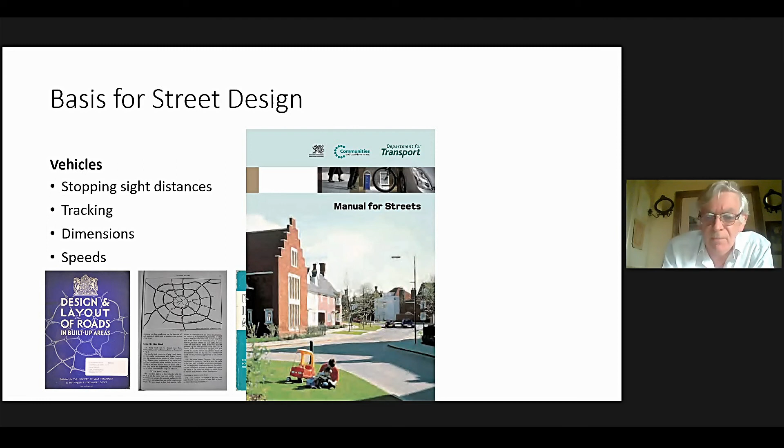Manual for Streets changed all that. It put people at the top of a user hierarchy. And since then, we've had the Equality Act, which now enshrines this in law. It's not just guidance, this is a formal legal requirement. There's a requirement to have due regard to the need to promote equality of opportunity in relation to protected characteristics such as age, gender, disability.

This means we should be considering the different walking and cycling speeds. A blind person may walk at 1 mile an hour or less, an elderly person similarly. This means crossing a street is a long and protracted experience where they're exposed to danger from oncoming traffic.

The consequences of different impact speeds and injury risk should be taken into consideration, as well as the ability of children to judge the speed and distance of oncoming traffic. They have major difficulties judging the speed of oncoming traffic travelling at more than about 20 miles an hour.

There is income and wealth. Not all members of society are able to afford to run a car, and the Equality Act requires that to be considered. There is a due regard to consider those issues.

And then we have this duty of care owed to both careful and negligent road users. These things must be taken into consideration when settling on decisions on street design. A practical example: there are local authorities, even at this moment, who are requiring that the size of refuse collection vehicles be taken into consideration when deciding on street design.

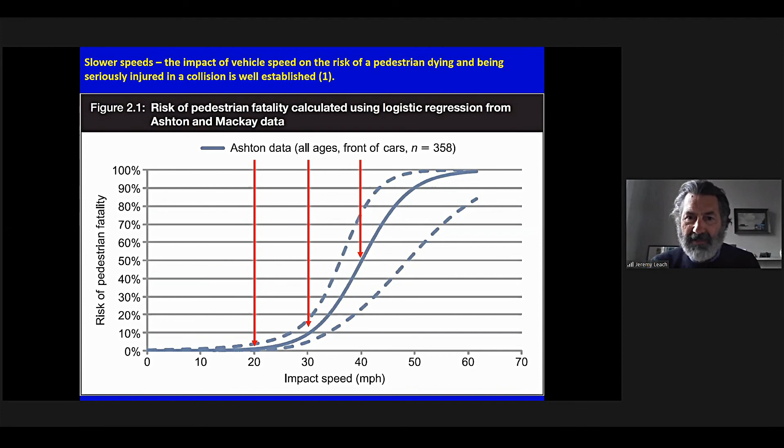Because it relates to street design, we're going to look this evening at slower speeds, safe street design, and safe space for cycling. The relationship between vehicle speed and pedestrians dying or being seriously injured in a collision is well established. Here's a chart showing fatality risk, and obviously it's much higher in terms of serious injury risk. We feel slower speeds have to be the building blocks of fairer towns, cities and villages. This was mentioned, certainly more than in passing, in the previous manual for streets.

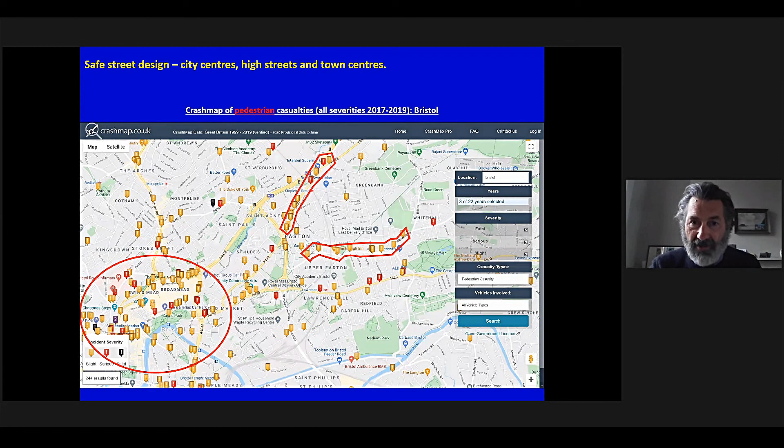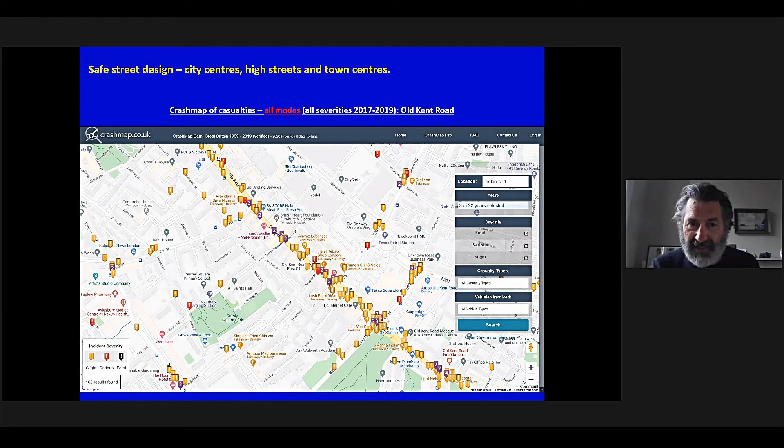This isn't to pick on any one particular example of the Red Route network, but you can see the characteristics: a lack of crossing facilities, higher speeds in free-flowing traffic, space allocation between people and vehicles clearly weighted towards vehicles, little emphasis on the role of the high street, no provision for people cycling. And when you do get to the provision for people on foot, the quality of the environment there is extremely low.

Another area that's really important is around junctions and crossings. More than 2/3 of deaths and serious injuries to pedestrians, cyclists and motorcyclists occur at junctions. People are at the greatest risk when crossing provisions are non-existent or poor, when they've got to wait too long to cross, or there's too little time given to cross.

And finally, talking about neighbourhood streets. Again, it's really important that we focus on this, which is why there's been so much focus on it in the last year or so. Traffic volumes have increased enormously on unclassified roads in Great Britain since 2009 - almost a 3/4 increase in the last 10 years in London, driven by the advent of sat-nav technology, the rise of Uber, and online deliveries.

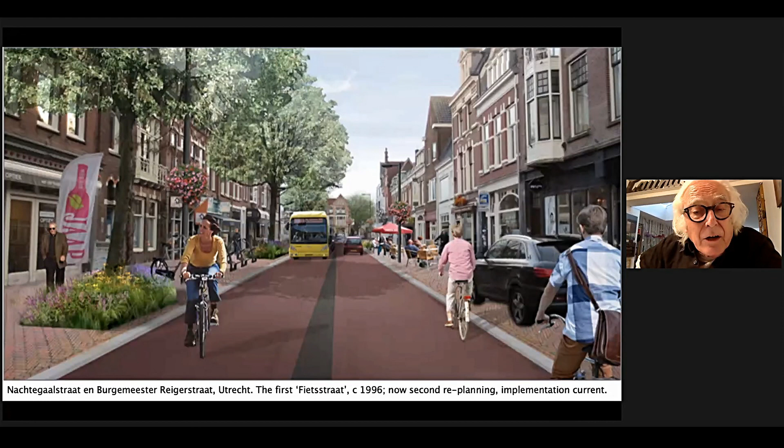It's easy to talk about bicycle streets. This is an example from Utrecht that took 20 years to develop. It was the first cycle street in the Netherlands and had a raised median, which was regarded as dreadful by cyclists because they felt motorists were hunting them. After 20 years, including 5 recent years of negotiations, they're now going to make it look like a fietsstraat. I'm not sure whether a fietsstraat is a legal entity in the Netherlands, but if we have narrow roads in towns with a reasonable amount of cycle traffic, how do we achieve it? One lesson I hope we'll take on board in Manual for Streets is to designate this kind of street where it is not legal to overtake a cyclist.

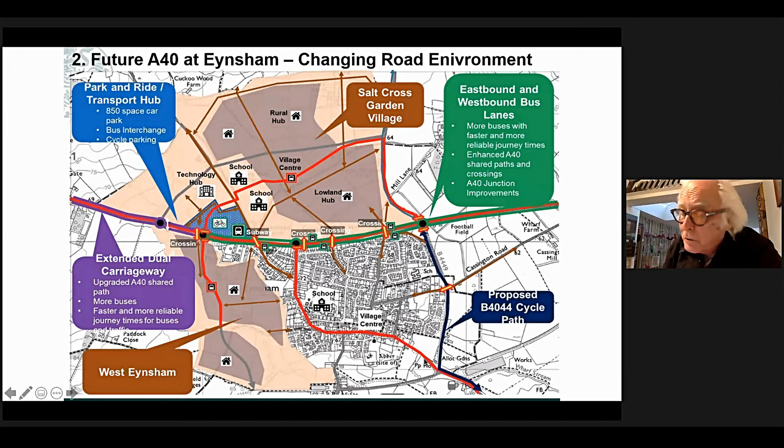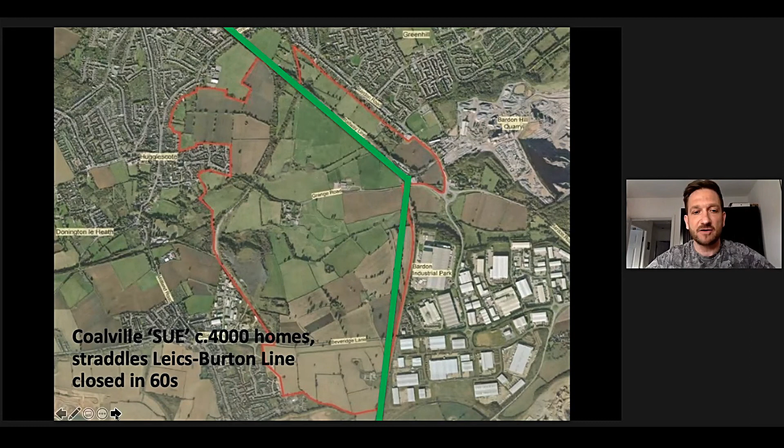And it straddles the Leicester to Burton line that carries freight now and refurbished tube trains down to the capital. But the line was closed to passenger traffic in the 60s. Now, the original plan when this was allocated was the line would be reopened on the back of government investment, and that investment has never been forthcoming.

So the opportunity to create a guided busway or equivalent between 4,000 new homes and Leicester city centre has been lost. A trip that could have taken 12 minutes on a guided bus at 50 miles an hour - sorry, there should be another slide there - takes much longer.

The developer wanted to put a protected cycleway network in on that development, but the Highways Authority didn't see it as being necessary to the safe and effective functioning of the highway, so insisted on its complete removal.

Obviously things have changed in COVID, but we all know that there might be some element of returning back to the city, returning back to the office.

Do we as the urban design group need to be more pragmatic than purists? Can we sustain arguments that the only way to improve volume house building is by breaking up volume house builders?

Will codes really help under-resourced, or very under-resourced, local planning authorities? Maybe codes will be outsourced - they'll be expensive, but will they be practical for day-to-day development management use? How can we break the cycle when there are examples where we ourselves are fueling some of the worst we see?

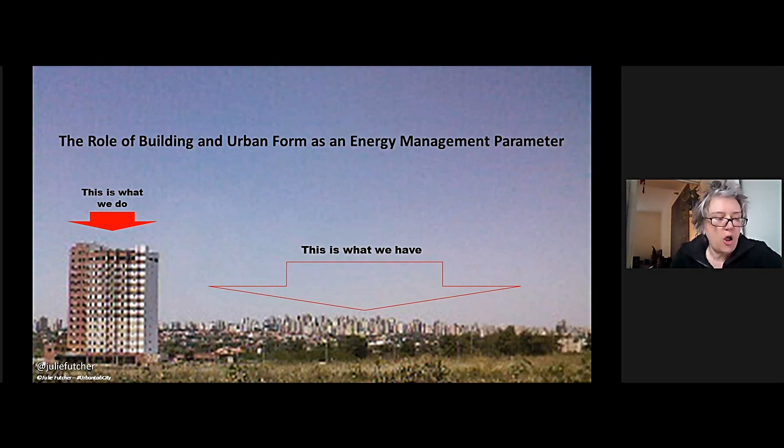In part, these oversights are a consequence of urban climate research being fragmented in its approach, drawing upon several different disciplines, each focusing on different spatial and timescales, often using different terminology to describe the relevant features, processes and outcomes. As a result, urban climate knowledge is often misunderstood, underestimated, and misrepresented in much of the non-urban climate literature.

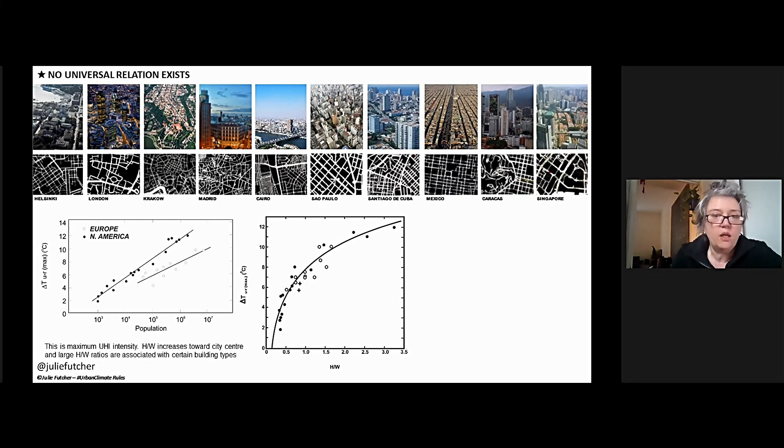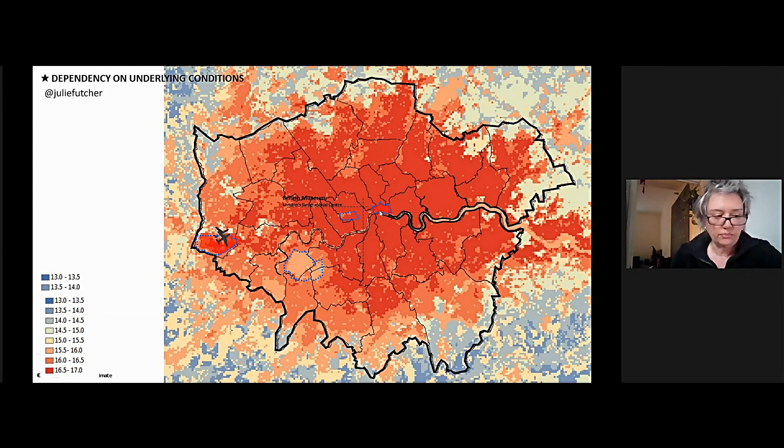To address this, urban land cover is categorised into a series of local climate zones based on their approximate ability to modify local surface climates due to their fabric, land cover, structure, and metabolism. However, even within these local climate zones, intra-urban climate differences can be found, where one side of the street can differ from the next, or be more shady or sunlit, sheltered, gusty, have good or poor air quality, and so on. Scale is important - at the intra-urban scale, climate differences can be significant and directly impact on both building performance and the conditions of the surrounding area.

To explore the significance of these net energy effects, we have developed a series of proof-of-concept research activities based around the City of London.

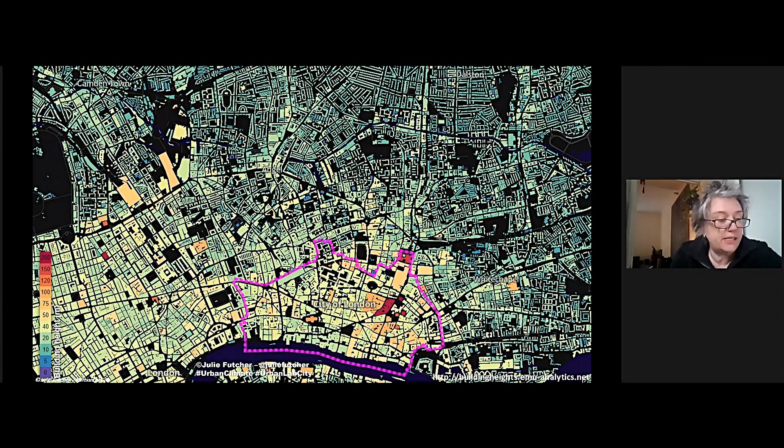These activities include an urban climate walk, where we walk through - you can just about make out the route here along this pink dashed line - using our bodies as thermometers to identify what's going on as we walk through. What are the impacts of all of these buildings, both the lower rise ones as well as the high rise ones, on our experiences, on our levels of comfort?

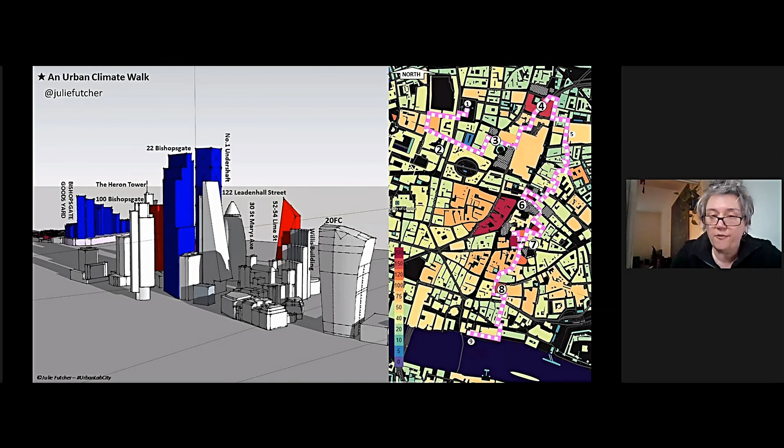This is a section where we can see how dramatic this is, how these large scale buildings have been inserted into a rather low-lying area. Now, the question is, is this good or bad? We don't know. If we removed this group of buildings here and turned it into a park, what would the net effect be?

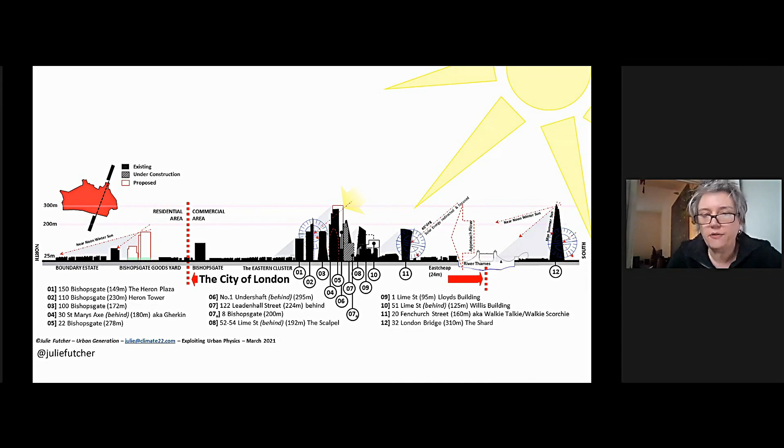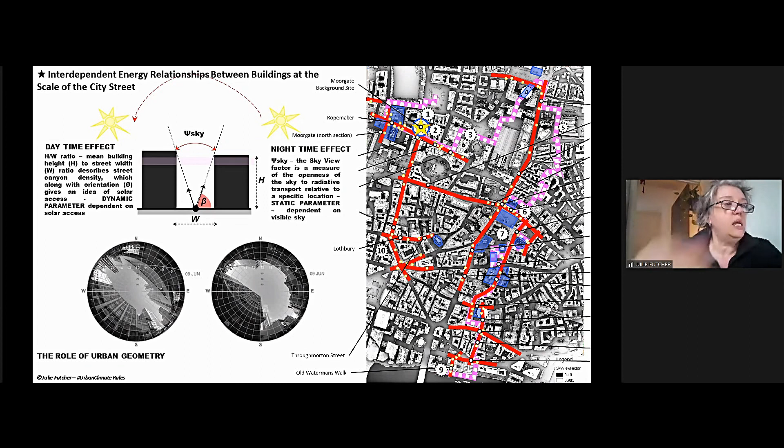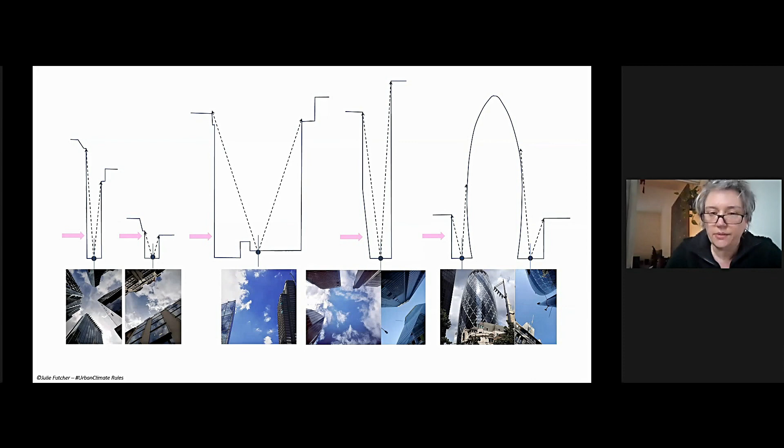As before, the city landscape is completely different depending on where and which part of the city you're in. But what we're exploring is how built form influences what's going on at street level. We're not researching what's going on inside the buildings, although we have simulated that to try and understand these interdependencies and those relationships.

We know it's a pretty obvious one that tall buildings are going to impact on our levels of shading. But if you already have a very dense landscape during the winter, the tall buildings aren't necessarily having a bigger impact on what's going on down at street level. It's the density of these areas that are impacting there, the openness to sky, or the lack of openness to sky, which is impacting on levels of daylight. The taller buildings, the shadows will pass over quickly.

I'm not saying that tall buildings are good for the environment. I'm saying that we don't understand enough about their wider implications, their far-reaching effects. What we're saying is that at the moment we measure buildings' performance that ends at the building envelope, and actually the building envelope, the boundary of the building, actually extends into the wider environment.

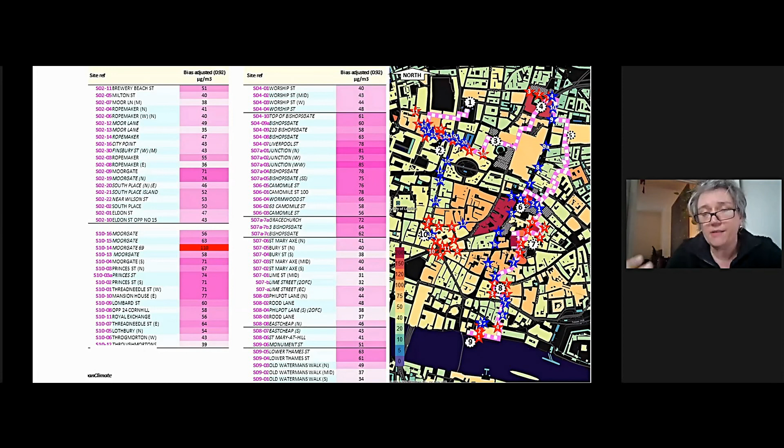We've taken air temperature readings, air quality readings, wind, maximum and average, and we have found some very surprising results. This is reports on our air quality, and what we find when we get to the city, when we get to the eastern cluster, the air quality is actually really good. So there we are, right in the city of London, right in the very heart, the very centre of it, we have really good air quality.

Would we get that good air quality if we were in a park? But that good air quality comes with a penalty, because the wind that comes off of those tall buildings is quite high and makes that area quite difficult to live in. So what might be good for a block of buildings which has a daytime function, such as office work, might be completely different to a building group used for residential purposes, where you might have good air quality, but at the cost of very windy conditions.

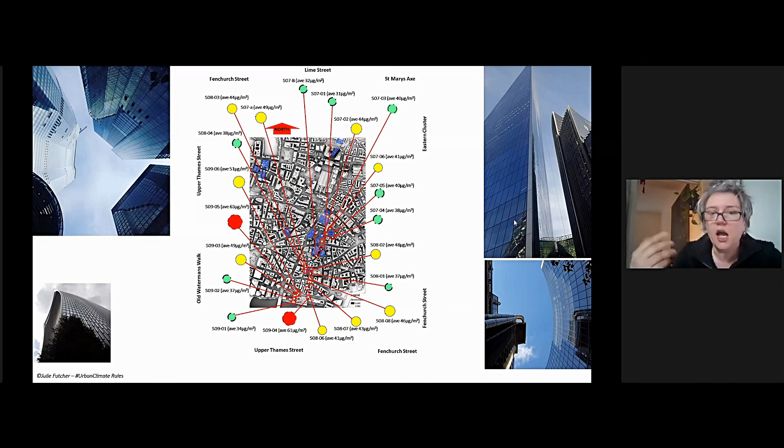Excessive warming can be managed at all scales through considered urban planning strategies. Obvious examples include those related to green vegetation and green infrastructure. However, critically, at the neighbourhood scale, built form is found to be the dominant factor in modifying radiation and ventilation exchanges at the urban surface. If properly understood, our built environments can be optimised to create effective, efficient, comfortable and healthy streets.

Both climate change and COVID have raised questions about the suitability of high density development, not necessarily tall buildings, high density. Tall buildings don't necessarily mean high density. High density development brings into stark relief the vital importance of gardens and access to green space for health and well-being - the same gardens and green space that are needed for climate responsive urbanism. That's my talk, thank you very much.

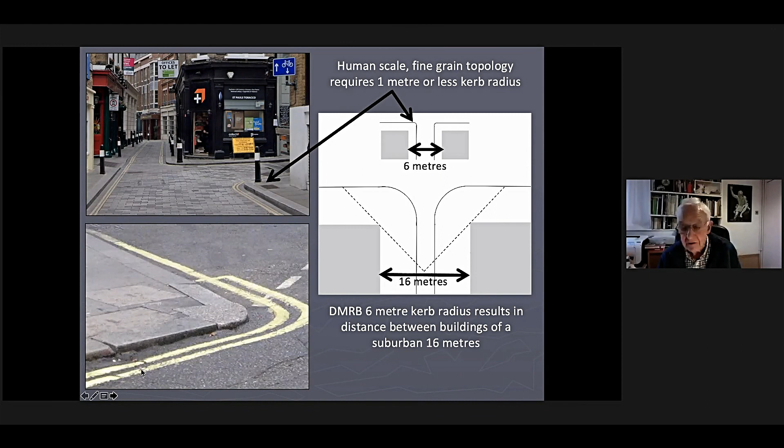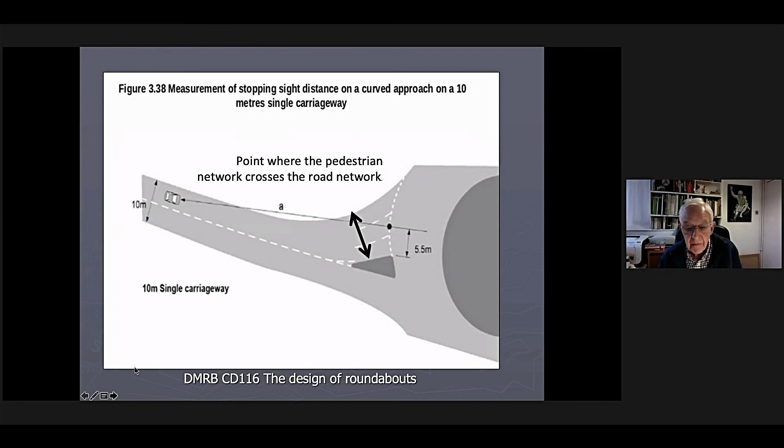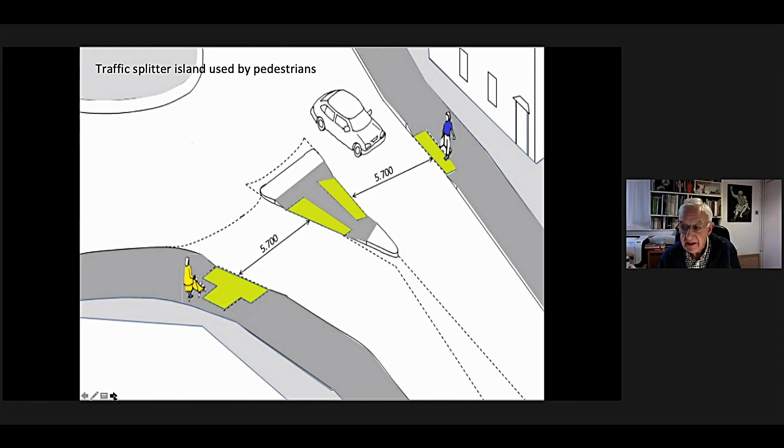The DMRB hasn't heard of things like inclusiveness. It hasn't heard about place or context or pedestrian networks. So all the designs are applicable to the Gobi Desert, but not necessarily to ordinary places, and we have splitter islands, which are terrible for pedestrians, excellent for drivers. It's still there, and to this day they're still being built - hundreds and hundreds of them.

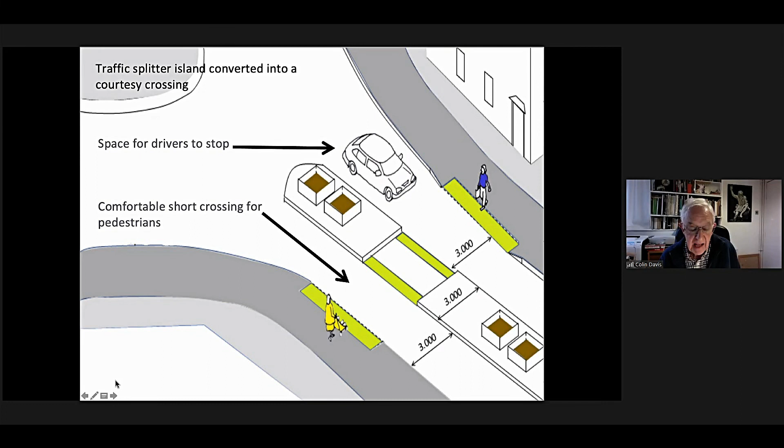And if you want to change it and make it slightly more pedestrian friendly, you have to have a big argument - you have to say, I will overturn the DMRB, because the DMRB doesn't allow you to make any changes. It's rather like the tablets, the Ten Commandments: thou shalt do this, and thou shalt produce thine sight lines. And if you want a nice pedestrian crossing across a T-junction, as has been done in Poynton and in South London, you can't do it according to the DMRB without a huge amount of trouble. So we have to think.

And then we have the Manual for Streets. It's certainly up to date, and it will be even more up to date - Glenn Higgs will do a fantastic job. But it is seen by many engineers as urban designers talking to each other. It's discursive, and it assumes a certain amount of pre-knowledge.

Also, we have to think where it fits into the rules. The highways are governed according to highway legislation, and under that secondary legislation, the regulations. Then there's guidance and advice and special interest advice - 20 or 30 different interest groups, including Living Streets and 20's Plenty and all those other very excellent people, have their own interest advice. And the poor old highways engineer has to decide - he's the one, not particularly well paid, that has to decide what is good and what is bad.

And the MFS has an opportunity of being responsible and helping highway engineers coordinate. Perhaps its coordination role is a very important role. I'd just like to say two points that should help engineers know more about urban designers - I wonder how many engineers are here this evening - but it should also help urban designers know more about engineering. So my question is this: what previous knowledge should a user of the Manual for Streets have?

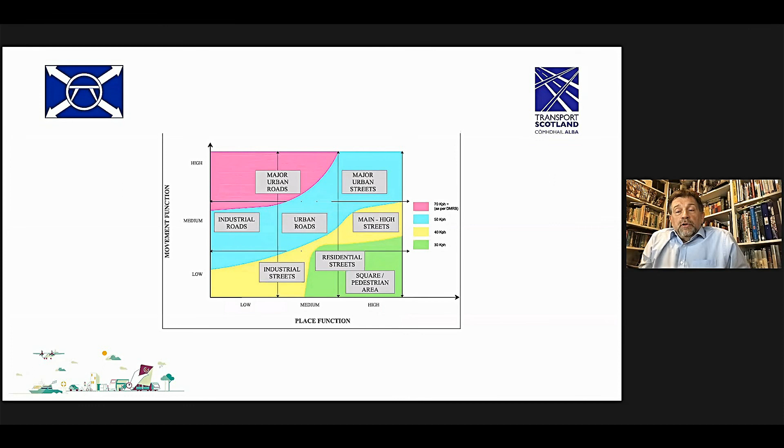And then through some research, we created a more usable place movement diagram with explanations on how to use it. So the whole principle of the document is to make it, or Designing Streets, more easily usable.

The principles section of the document, the second one, covers all the necessary consents, what's required for each element of the street to ensure that it can be adopted by the Roads Authority, and then the process to be followed with the appropriate forms. So we use standard forms in Scotland so that everybody's using the same forms.

And then in the details section, we go into much more information on the roads design, including the parking, all the required parameters, details, and along with all the construction details.

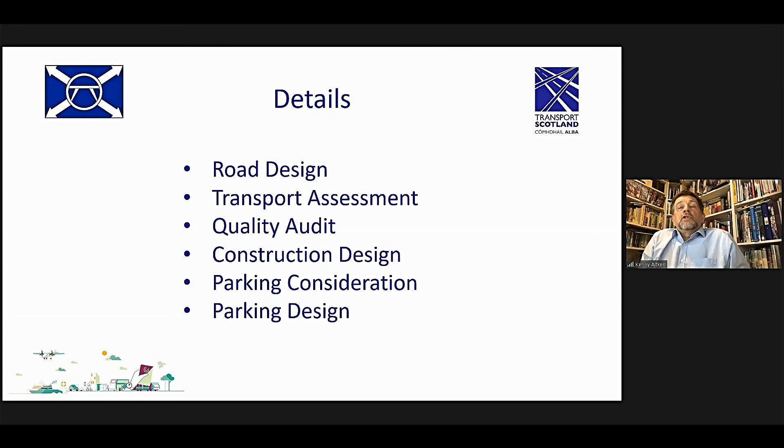So when we actually launched the document in May 2014, we wanted to make sure that it was widely adopted and everyone understood the principles behind it. So we set up 3 full-day seminars across Scotland with well over 100 people attending each one.

Then we set up 2 workshops, which we held centrally in Stirling in the centre of Scotland. Again, this was just for those that were more interested in actually using it so that they could come and practice and learn how to use the document in much more detail. We prepared guidance notes, and along with Scottish Government planners, we set up a web-based toolbox, again, to help users understand the processes involved.

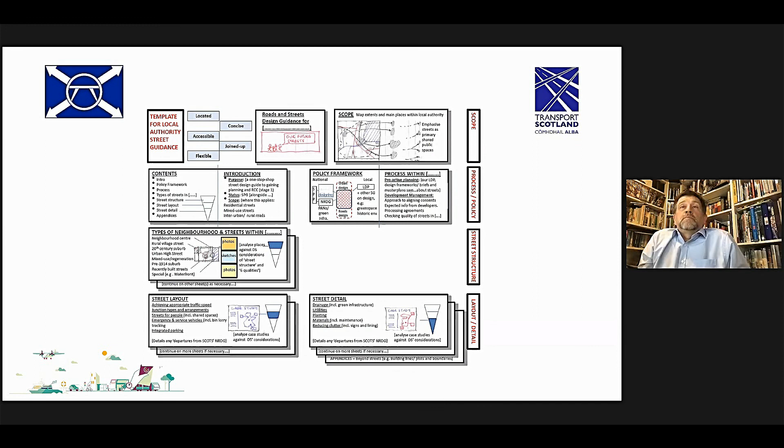So, it's a living document, the Roads Development Guide. It's not published and left to rot on the shelf, so to speak. And we do updates and improvements on a regular basis. I'll now talk about that in a bit more detail.

So the document is web-based with free access to all on the Roads Improvement website. It can be downloaded as a complete document.

You can see here that there's a massive difference in Scotland in land types, types of roads, population densities, and so on. And so we accepted that it wouldn't be one size that would fit all. So we knew that each road authority wouldn't be keen on just adopting absolutely everything in it.

So we allowed each road authority to introduce variations. And these are linked within the document, and they can be accessed by clicking on the appropriate council within that map, and then that opens up a separate page, and that's got the variations on it for each appropriate local authority.

Because it's a lot of it is web-based on that system, we had a bit of guidance on how to use it. Just the centre bit there, if you can see, there's a chain link on it. Often we decided that rather than publish or print a lot of additional information, we would just provide a link to the actual document. So it gives you a brief summary of what the document does and what you need it for, and then you'd click on that link and it would take you directly to that document.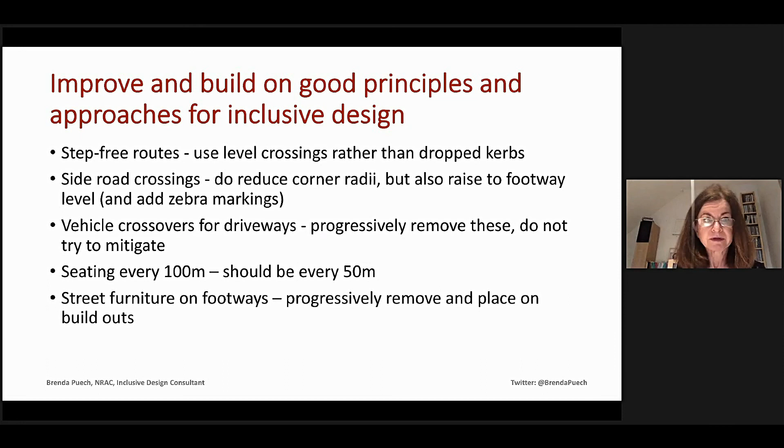That's just to talk about how to make low-traffic neighborhoods more inclusive, because there's been a lot of comment on them, particularly from disabled people. This is learning from the new Pave the Way document that Transport for All brought out. It's not enough just to reduce motor traffic volumes and speeds. Existing streetscape left clear of through motor traffic, after decades of neglect and motor-centric design, has made it virtually impossible to use for active travel by many disabled people. We all know the issues: narrow footways, motor-centric street furniture further obstructing them, steep crossfalls, cobbled crossovers, difficult side road crossings, poor maintenance, poor surfacing, often due to pavement parking that has not been addressed. So we need robust processes on how to rectify existing streets alongside the implementation of low traffic neighborhoods.

There are some new inclusive access issues we have to deal with. One is electric vehicle charging points, which are all over the footway now, exacerbating the footway situation. Another aggravating factor is when lampposts are used for charging, with hanging cables going across the street. This is a hazard for everyone, particularly visually impaired people. We should be integrating navigation apps for visually impaired people within every streetscape. Instead of talking about car clubs, we should be talking about cargo bike clubs, family bike clubs, cycle hire and adapted cycle hire hubs.

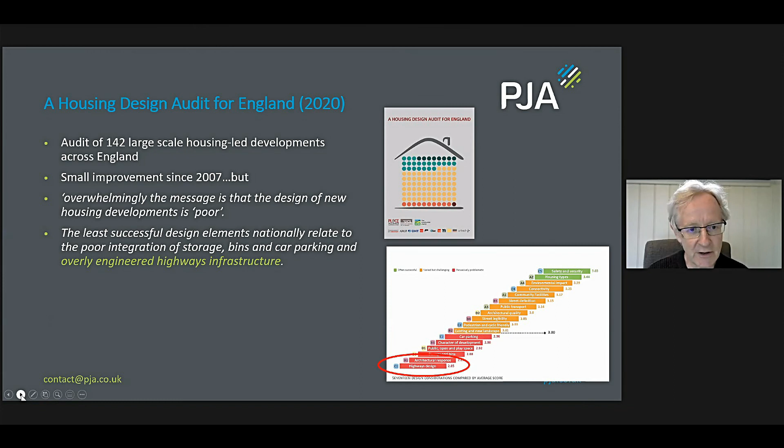The quality of mass housing has not improved. And I spent a lot of time thinking, why is that? I know Tim's going to speak after me, but I remember him saying this - he may well deny it, but I remember him saying this.

We were at pains to think that the future lay in reducing the frequency of numbers in the guidance. We thought engineers were constrained by the numbers, and that if only we had more information, more appeal to people to think from first principles, then we would set engineers free to design more creatively and work collaboratively with urban designers to create great places that may not have met standards, but would be great because we understood them from first principles. And of course that didn't work.

A few years, about 10 years later, I was in a meeting. I got very cross when a highways DC officer said to me, 'We can't work to Manual for Streets, it's too fluffy.' I got all cross with her, and then realised actually she was right - if she can't work to it, then it's not performing its function. So we need to do something about that.

I think that's one of the things, and I know Glenn is very well aware of that. It has to become clearer and say what good looks like. But how can we do that? The difficulty is, how do we do that without everywhere becoming the same, which is one of the things we're trying to move away from, because that's what DB32 does.

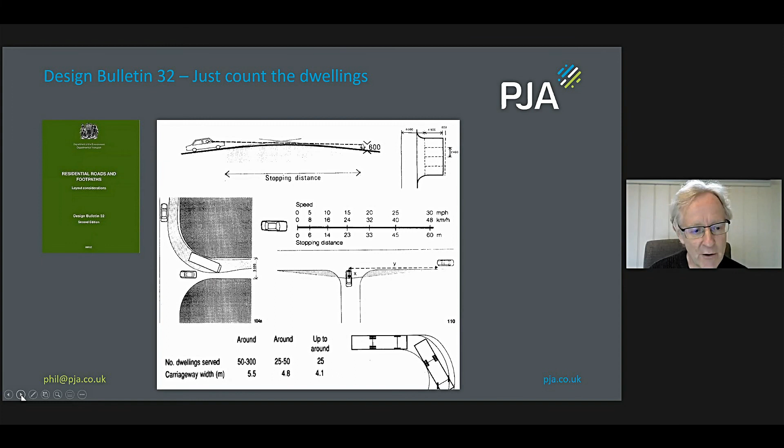Engineers love it because it's very easy - you just look at the numbers, you count the dwellings. The fact that you can have carriageway width based on the number of dwellings served tells you that this is a cul-de-sac layout, it doesn't have to spell it out. You can't count the number of dwellings served by a grid of streets. So that's what it is, and it works very nicely. It's really easy, makes your job very easy, and it gives you a defence if things go wrong, because you say, well, this is what the book told me to do.

So yeah, we need a new MFS. Yes, please. But in the meantime, I just thought I'd share this is something that we're working on. I know Amy Burbidge of Homes England was originally going to be part of this, and Amy's our client for this, so we hope the new Manual for Streets will help us. In the meantime, we've been producing this document, which will be launched pretty soon - a companion guide to Building for a Healthy Life that we've just tried to make very much a companion to Manual for Streets as well.

To try to show in a bit more detail what good looks like, it's full of pictures, and this is part one. We hope to be commissioned to do part two shortly, which will include some standard details of just the things that regularly go wrong in new housing. We're talking to Glenn about that, and we hope that if this proves to be a success, it will be an easy fit and can be adopted and taken into the new Manual for Streets. So work is going on, and that's our little contribution to this process.

But will it be enough? I was asked, and I contributed some thoughts to the Building Beautiful Commission, and I referred back to Better Streets, Better Places. I think I said that Manual for Streets was not the only recommendation - a lot of it was about motivation. Why should a highway authority pick up this book and implement it? Because our bookshelves are littered with guidance that is not used.

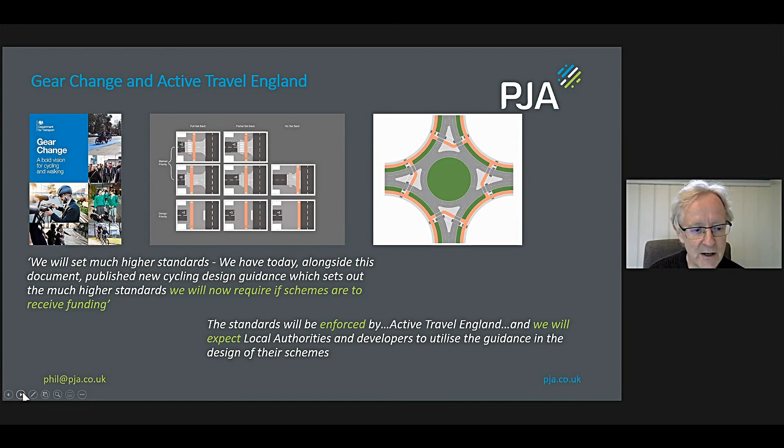So how do we get it, it's a manual, which means it should be taken in hand. How do we get it taken in hand? Policy and process, yes, but I think we need to show very clearly what good looks like. We have to recognise everyone's under time pressure. Engineers, like everybody else, there are many, many engineers who want to do the right thing, but they don't know what the right thing is. We have to make it easy for them to do the right thing, so practicing engineers can understand. But we have to have some kind of carrots and sticks to make sure it is applied, and I think it's for others perhaps to decide what those carrots and sticks are. So that's it for me. Thank you.

Thank you for that overview and that reflection on how we got to where we are at the moment. Tim, where are you? Do you want to go next and share your reflections?

I was asking myself, do we want to see evolutionary or revolutionary change when we see the new Manual for Streets? And it struck me that probably we need a bit of both. I feel it certainly needs to shift emphasis. I'm not about to enter a defense of the fluffy, but there does seem to me to be a need to link between national policy and the content of Manual for Streets. Especially if Manual for Streets is to be mandated, if local authorities are required to use it as opposed to being allowed to get away with not using it, then the congruence with high policy goals, if you like, needs to be dealt with.